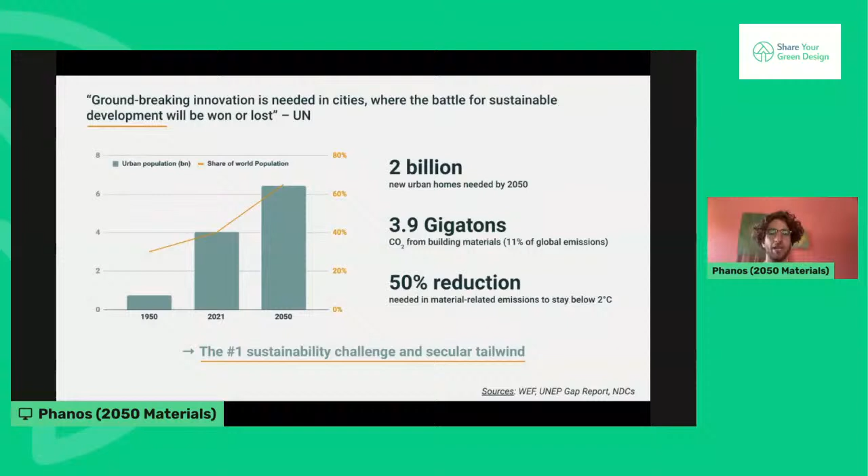Now, the very specific problem we're looking at at 2050 Materials is that currently the construction sector has no cost-efficient way to build these necessary sustainable buildings. While there are examples, and I'm sure that on the Share Your Green Design website you can find a bunch of examples of sustainable buildings, it's unfortunately still far from being the common practice in the sector.

And a big reason for that is that it just costs more money usually to do the necessary processes which define what a sustainable building is. So more specifically, you have these large architecture, engineering, and construction companies that are committing to deliver sustainable projects. Now these companies, in our research, have no tools that allow them to translate these sort of targets into a design practice. So what that means is that usually there are external professionals that have to deal with sustainability factors that come into play to do a lot of this translation.

So if you're an architect that has worked on such a project, I'm sure you can vouch for the fact that it's quite a tiring process, and also simply costs more money and takes more time.

And then finally, and really most importantly from a climate perspective, the design process is unfortunately still decoupled from the actual materials procurement process. So what that means is, even with the best intentions of an architect to deliver a sustainable project, then what they might design and what they might deliver might not end up being the real building that's put up.

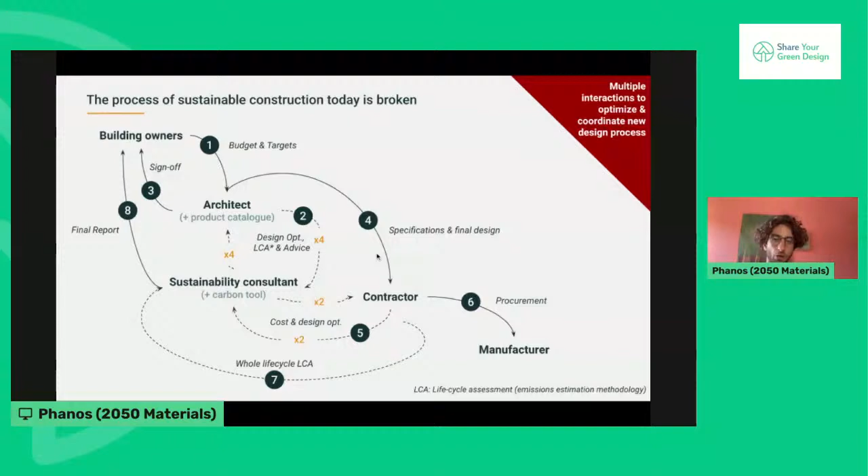Now a little bit on what we actually do. 2050 Materials is building a workflow to track, implement, and build the low carbon buildings that need to be built within the budget of a client as well as on time. We're building a workflow that allows you to preset whatever climate targets and constraints you have for your project, and our platform lets you receive optimized designs from a materiality perspective that allow you to meet those targets.

And very relevant to this specific topic of the webinar today, we have a large product database where you can both find products as well as source them and eventually put them together to report on the performance of the building.

The reason we focus so much on materials as a group, as a company, as friends working on this idea, is that what we kept hearing from architects and designers is that consideration of all the new and alternative materials is very necessary, and it's something clients are asking for as well, and architects want to look at. However, the fact that there are all these new materials and new parameters that need to be looked at adds a layer of complexity to the specification process.

While it's a lovely idea to think that everyone will learn every single detail on these materials and really be an expert on what they need to specify in order to align their design with sustainable development, we think that simplification is warranted in this case. So what we try to do is essentially put the data around these materials in front and then allow easy comparison.

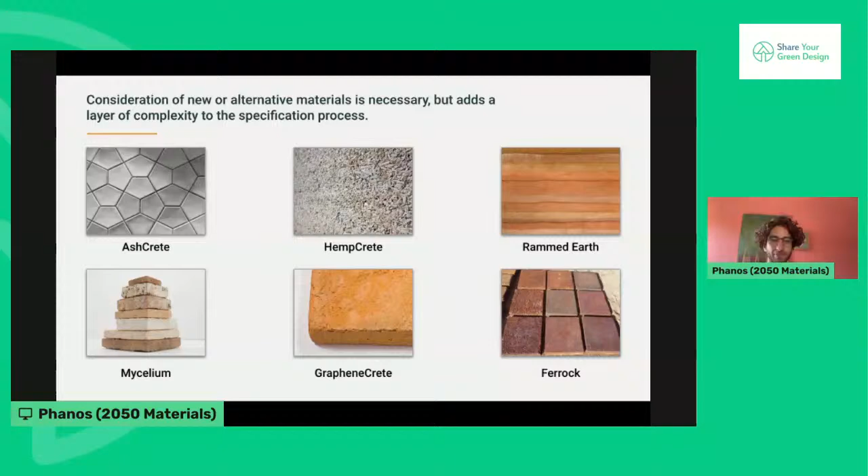What we're currently developing, and I'll talk a little bit about that also in the Q&A if there's interest, is what we call a project workflow, which is essentially the bridging of the tool side of things with the product library.

A little bit of feedback from the industry. When we launched our beta publicly, we received quite nice feedback from the industry. Of course it's very nice as a group to just get some positive feedback after working so hard on this topic. What's even more important for us is that there really seems to be something we have gotten right, and that is that in the space of sustainability and materials, there really seems to be a gap in a solution that helps architects and designers really understand the data behind those products.

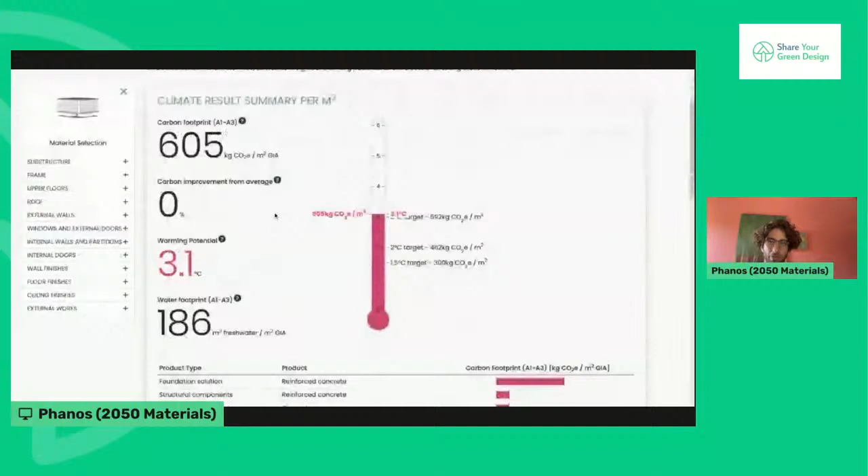Then you can generate one of our dynamic tools. What you see is data on the embodied carbon of the building. We currently cover life cycle stages A1 to A3, essentially everything related to manufacturing these sustainable materials. We also translate these metrics into a warming potential metric, an indication of the building's contribution to a specific climate scenario.

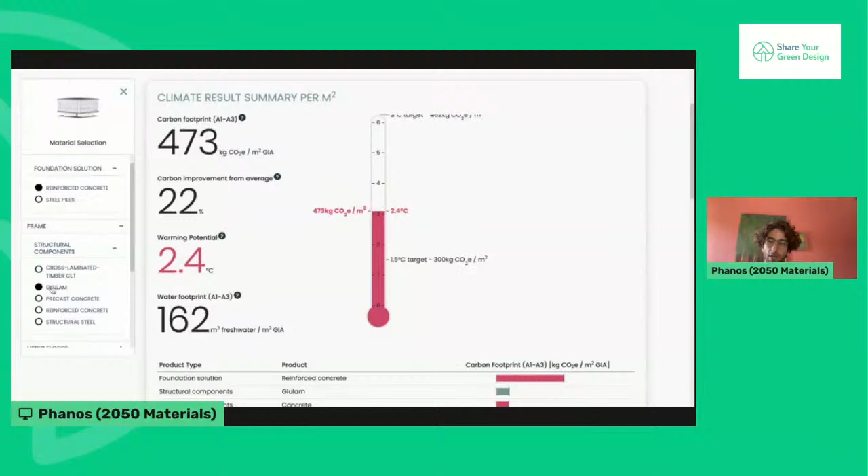The reason I call this tool dynamic is that you can go into these dropdowns and play around with different selections. When you do, we automatically calculate the embodied carbon footprint of the building per meter squared, as well as all the other related metrics.

This includes the water footprint, the warming potential, and how this building compares to an average building. All of these apply both to structural components—substructure, frame, floors, walls—and all the way down to finishes, both wall and floor finishes.

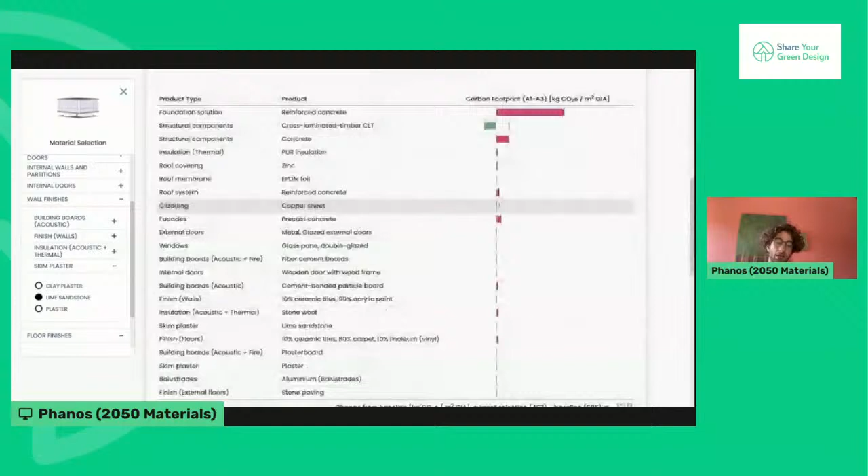What's interesting about these tools, especially from architects we work with, is that you can use them to get an initial understanding of the hotspots and primary sources of emissions in a specific selection of materials.

What you see here is a plot of the embodied carbon footprint per meter squared of gross internal area of the building for each selection. So if I select structural steel in my frame, you'd see this appear here, and if you hover over it, you'd see the amount of emissions related to that.

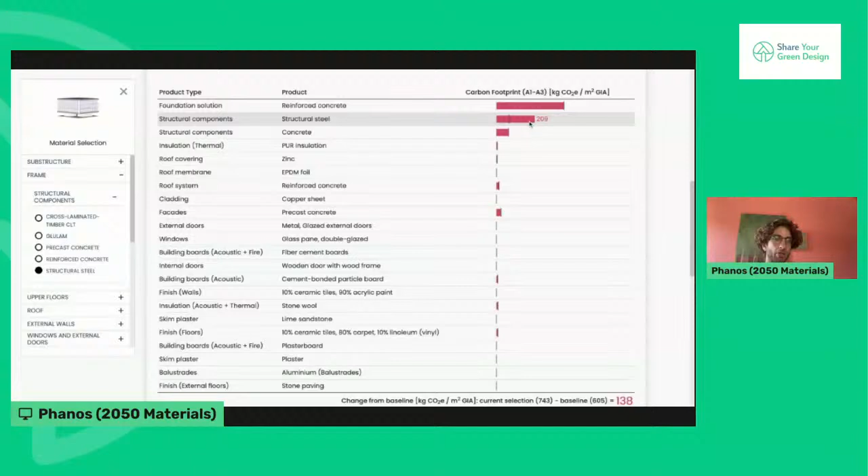Then we have this black line that indicates what we consider the baseline—essentially what is most commonly used in that component of the building—so you can see whether you're on average exceeding that baseline or below it.

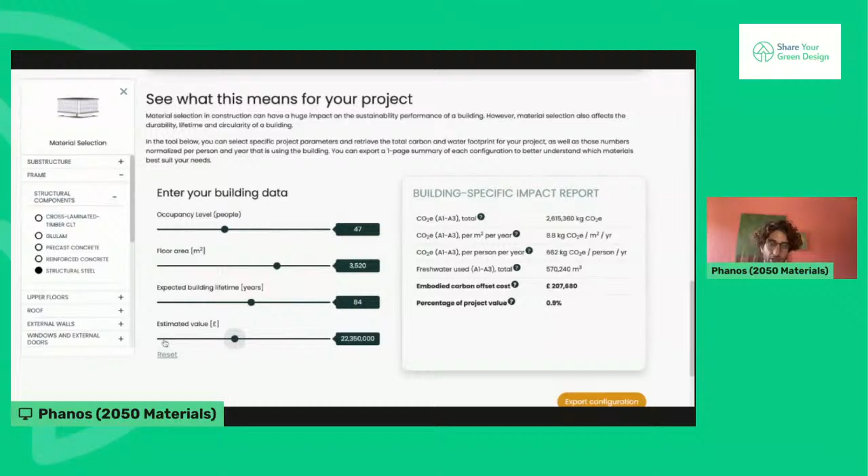One last thing I'll show is that all of this information can be made specific for your project. You can enter the occupancy level of the building, the floor area, the expected lifetime, as well as an estimated value. What we provide here is the total carbon footprint of the building, not per meter squared but the entire amount, as well as the same number normalized in different units. For example, we show the carbon footprint per meter squared per year, which indicates how much emissions are attributed over the building's lifetime, and we do the same on a per person basis.

The reason we have these kinds of tools is to generate discussion in the construction sector. We want architects and designers to go to their clients and discuss the differences between building something meant to last an expected lifetime of 100 years with 120 people, versus building a pop-up store that only lasts, say, 1 or 5 years with a much lower occupancy level. We want to generate discussion around how much carbon footprint each type of building, depending on its use case, is supposed to emit, and we're providing these metrics before there are official benchmarks from regulators.

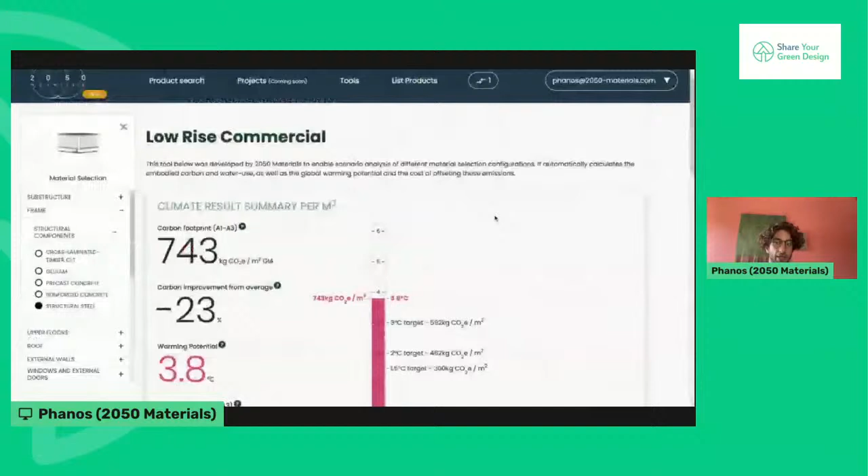Now, all of this information is exportable, and again, I invite you to check out these tools. Everything is currently free on our website, so you can export these reports or bring them into your client meetings to generate some of this discussion.

Moving to the product side of things, here we have the product library. You can search for products in a few different ways—for example, by application, meaning by building applications, or you can type in a specific product. So I can search for tiles, and I'll see all of the tiles listed by manufacturers on our website.

What we try to do is create all kinds of filters to enable architects to really get to the specifications of a product that solves their needs. That includes filtering by material type, so you can, for example, just select clay. You can also filter by product type, the company or brand providing it, fire performance, and product certification—so if you're looking just for products with environmental product declarations, you can filter for that.

Within this process, you can open a product page and see all of the relevant information provided by manufacturers. You see certifications here that are downloadable as PDFs, and a lot of the work we do as a company is extracting information from these certifications and digitizing it in a format that's easy to find and compare between products.

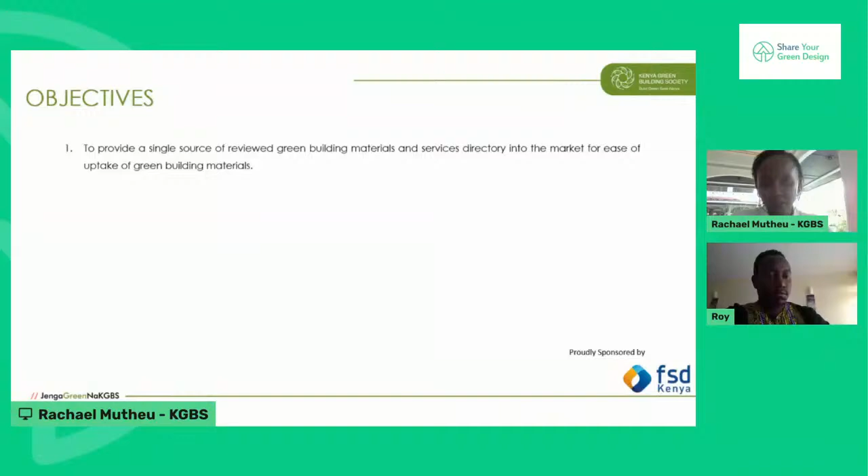So that was a big gap we were trying to solve. Then the second objective is to demystify green building products by democratizing the information on the product. So when we showcase products on the platform, you're able to take them as the single source from objective one, but we also give you more information - so we are saying this is a sustainable product, why is it a sustainable product? We list the efficiency features of that particular product.

And the other objective is linking developers to material suppliers, stroke manufacturers, and service providers. So again, the linkage - you ask people, do you know if these things are manufactured in Kenya, or do you know of this particular product? And they'll be like, I have no idea, so I'm just using the conventional materials because I don't know any better.

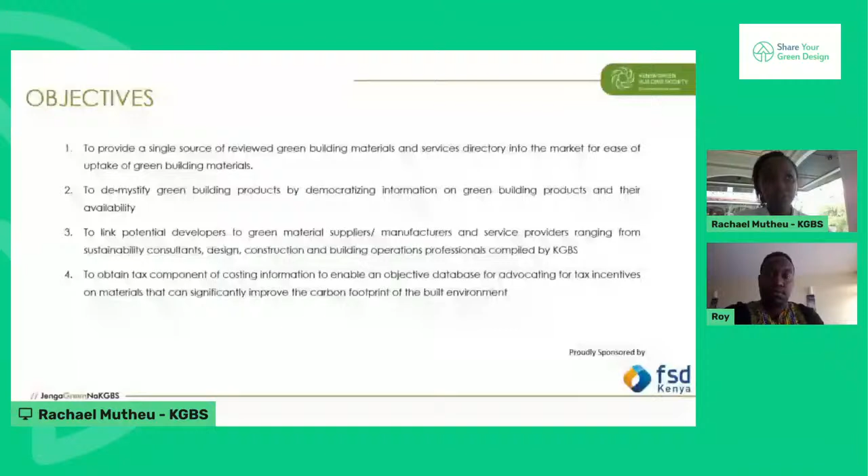So that's another gap we were trying to answer - obtaining the tax components of the cost information. We will do a preview of what the library looks like, and we'll see that it has pricing components for the materials with a disclaimer, of course, that these are prices as of this time period, so that when we get to the point of advocating for tax incentives on materials, we know where we are coming from, what the costs are right now, and where we envision the future looking like.

As you remember, one of our other mandates as KGBS is advocacy, and number 4 is understanding the pricing of green materials.

The functionality of the library is that it is hosted on our website, the Jenga Green Library. We'll do a quick dive through that. It's also available as a free Android and iPhone application for anyone to use, and I'll share the link in the chat box after the presentation. You can access the library through this link tree link, and we have over 140 products and over 20 service providers.

Since the launch, we've had 500 interactions within the web app, the mobile apps, the iPhone and Android applications. So we definitely see the gaps we're trying to solve, getting people's attention with the interactions, and we hope to grow the interactions more.

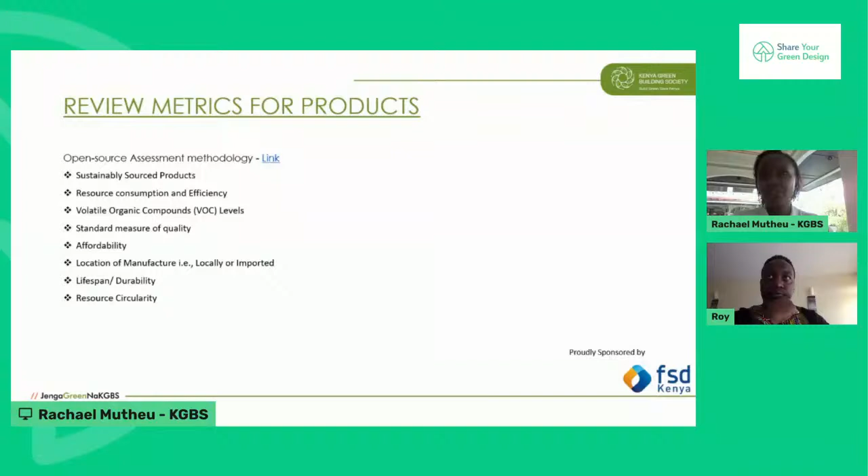Just to run through, we'll share the slides and show you where on the website you're able to interact with the methodology for review comments. This is again open source, so we are reviewing the library — comments are welcome.

This is divided into energy solutions and green building design consultants, and another category on circularity, which covers circular building products and recycling companies.

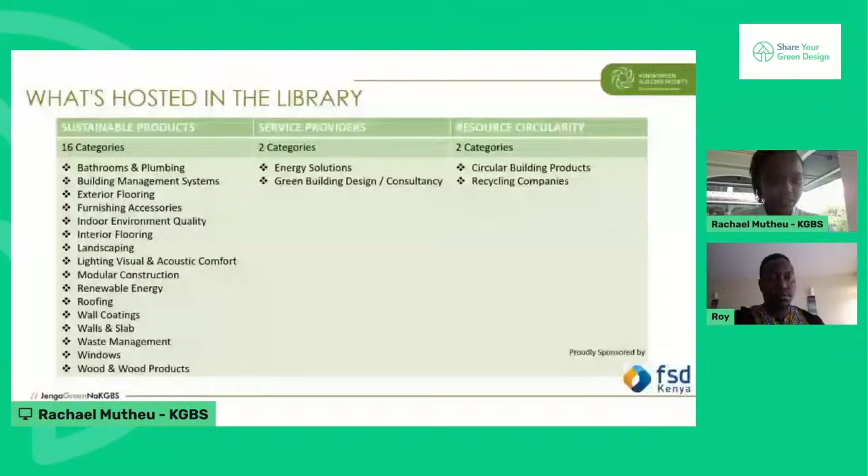Just a quick overview of what the library offers. I'll share a quick snippet of a video now.

That video shows how you interact with the web app. Once you're on the web app, we'll do a quick dive into it — you're able to find the different categories, then look at each product as you'd like.

So here we are in Kwangu Kwako studio apartment, which uses modular construction. You can see the company name, the price per unit, and as we said, there's a price disclaimer for anyone posting the product within the directory, along with the company website — because the library isn't essentially a sales website, but rather a platform providing this information. We provide the link to the company website so you can interact with them further, and if you want to make a purchase, you do it directly on their site.

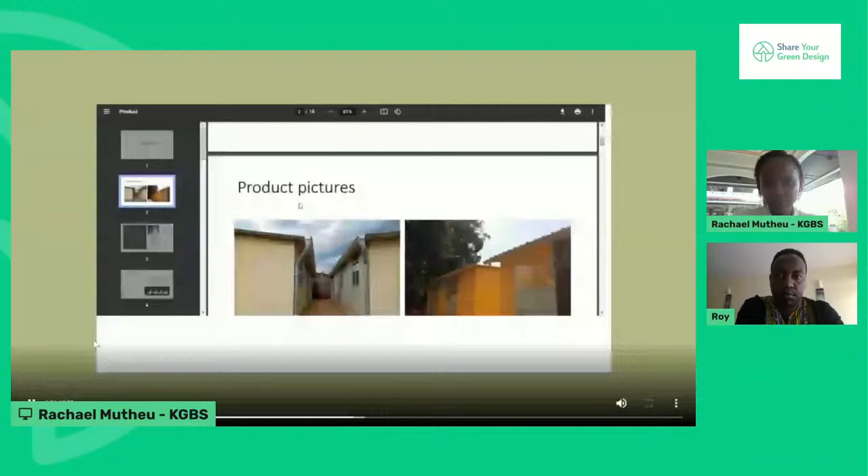So I think... so this now is on your mobile phone.

So now you use it on application, which ideally shows the same interface as the one on your screen, and you browse different categories. If you want to look at services, you can see the credentials of the service providers. If you want to look at resource circularity, you look at either products or companies in the circularity space.

I'll just move on to the next slide, and everyone will be sharing the link to access all this information in the library, both the web app and the mobile applications, for your further interaction.

So I'll introduce Roy to briefly introduce the next work stream we are working on in terms of sustainable building materials. I look forward to the question session at the end of our presentation.

Thank you much. Thank you very much, Rachael, for that.

So I'll jump into the ABMTs. Before that, I'll also speak about why we wrote alternative, appropriate, and emerging. With this stream, we have alternative building materials and technologies - that's what it stands for. However, when we started this research, we realized a lot of these things just end up as documents, because there's no appropriateness to it. So we started looking at appropriate building materials, which is more or less localized materials, which now leads to localized services and the likes.

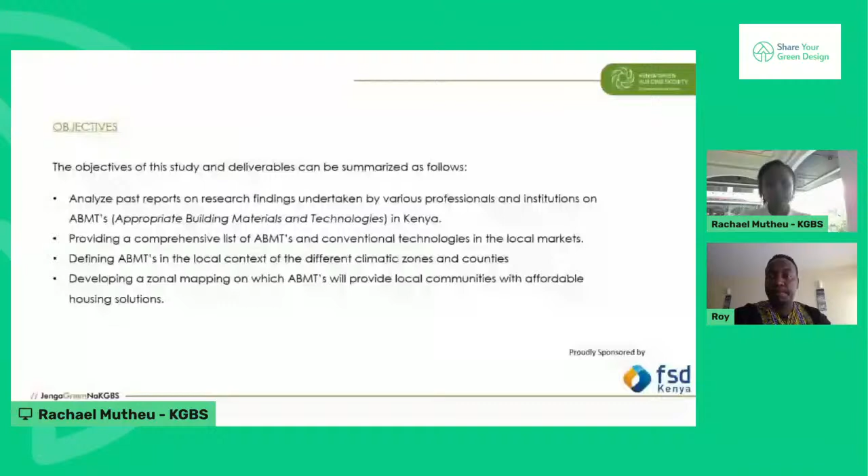Hello? Hello, I don't know what happened. Sorry about that, I don't know what happened to my link.

However, what we start to see is that the inclusion of these materials from different counties in different locations in Kenya will now create that linkage between the location and the materials that are going to be used.

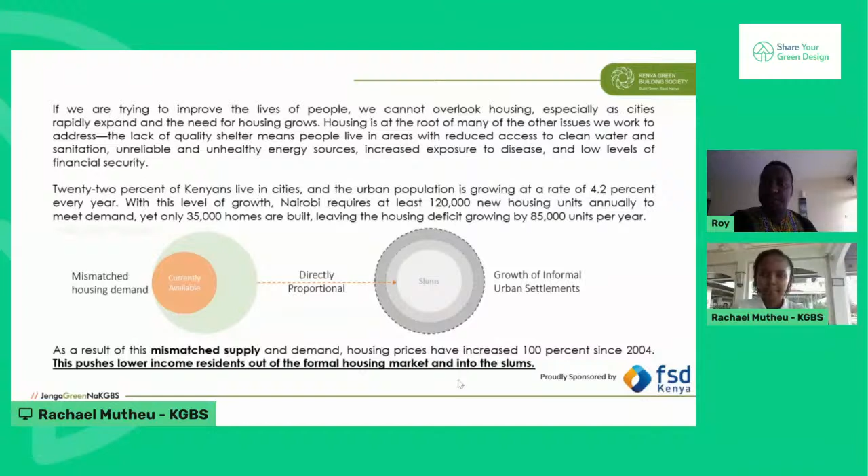So what we came to realize is that we have to find a couple of creative strategies to try and solve this issue. We may be looking at materials, but when you start looking at materials, you're also trying to solve affordable housing at the same time. That's why one of the creative strategies is to look at alternative and appropriate building materials and technologies.

We start to find that the land is too expensive, so if we can make this land more affordable - putting this into perspective for someone living in that specific location - having creative financing, innovative design, keeping things simple but creating good quality spaces, developing contracts with suppliers so prices aren't hiked, and community supported labor. That's talking about culture, it's a need-based construction system, instead of having to import people from different countries to come build your houses.

So there needs to be a shift from simply looking at cities, because one of the problems we're seeing based on the previous slide is that you have that deficit with regards to housing, but the only focus is on cities. If we start to focus on secondary cities and towns, it would be ideal to develop these strategies, reducing the pressure on primary cities, which in turn reduces the pressure on informal urban settlement growth.

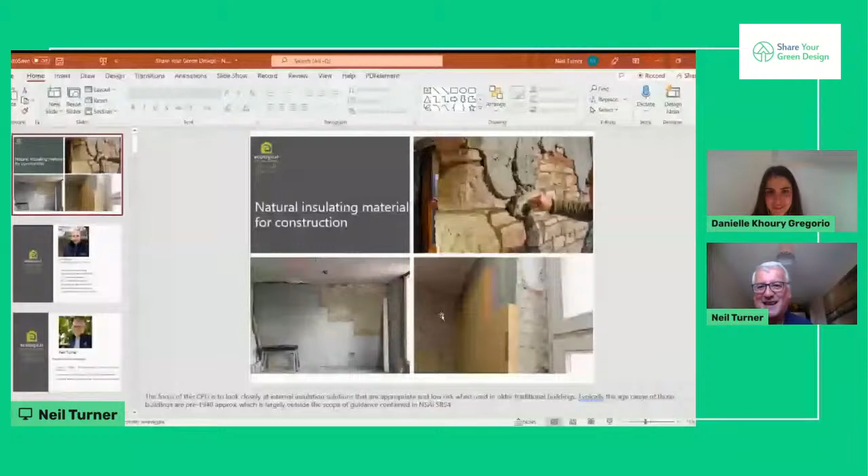Okay, well, thank you very much. And Neil, you are mute. Am I on mute? No, now we hear you. Good. So let me just share my screen. It doesn't want to come up again at the moment. Okay, can you all see this? Yes, we see it. Okay, excellent.

Okay, well, good afternoon, everybody. My name's Neil Turner. I work for a company called Ecological Building Systems in the UK. Today was supposed to be presented by my colleague Joe Fitzgerald, who heads up the technical department in Ireland, so I'm standing in for him today. Basically, I'm going to be talking about natural insulation materials for construction.

I'll just introduce both Joe and myself. Joe works in our Ireland office. He's the technical specification manager, and he's got a diploma in green engineering. He also does things such as thermal modeling calculations, WUFI calculations, and he's a certified passive house tradesperson.

In terms of myself, I'm quite unusual in that I'm a scientist by education, but I've worked in construction now for 25 years. You can tell I've been around a fair while because of the grey hair. My bulk of experience in construction is really with natural insulation. I used to manufacture cellulose insulation from recycled newspaper. I'm also involved in developing European standards for new insulation products and developing new test methods.

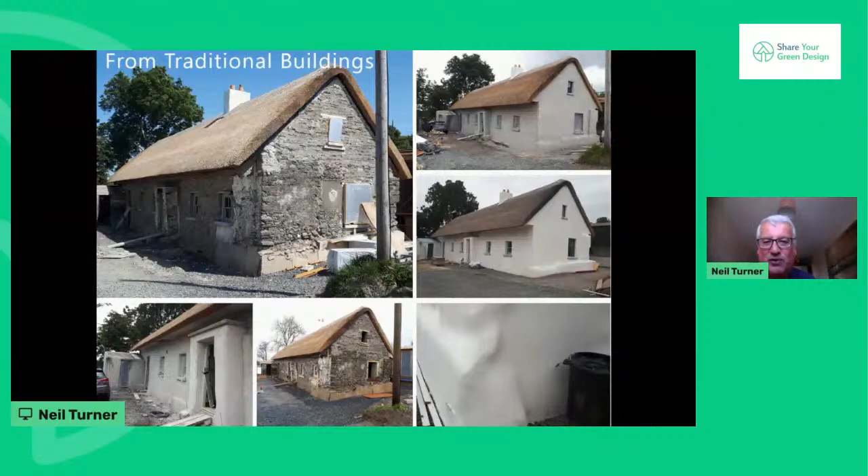A lot of people are surprised by this, but natural insulation products are extensively used in traditional buildings - solid stone, solid brick - and they're also used in new build. So you can use these natural type insulation materials across a whole broad spectrum of building types.

In terms of resource efficiency, I know in Ireland they've already adopted the NZEB standard, the nearly zero energy building standard for new builds. So people say, well, we're already building to a much higher standard, why do we need to consider the materials? There is a standard that's actually more onerous than NZEB, and that's Passive House. But basically there's really a limit as to how thick you can necessarily insulate a wall, roof, or floor.

So you could then ask the question - how can you actually get more reduction in the carbon impact of construction? The theory, the principle we've been promoting for the last 10, 15 years, is that you push your building fabric as far as possible. And you must adopt a fabric first approach - thicker insulation, cutting your thermal bridging, careful material selection and planning, build quality, and energy efficiency. You've got to have healthy buildings, so ventilation when building to high insulation and air tightness, while having an overall low ecological impact and an ultra low energy demand in use.

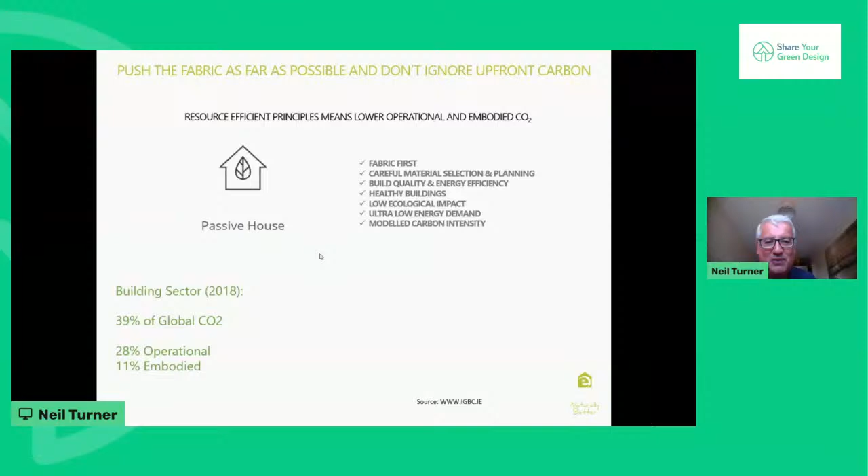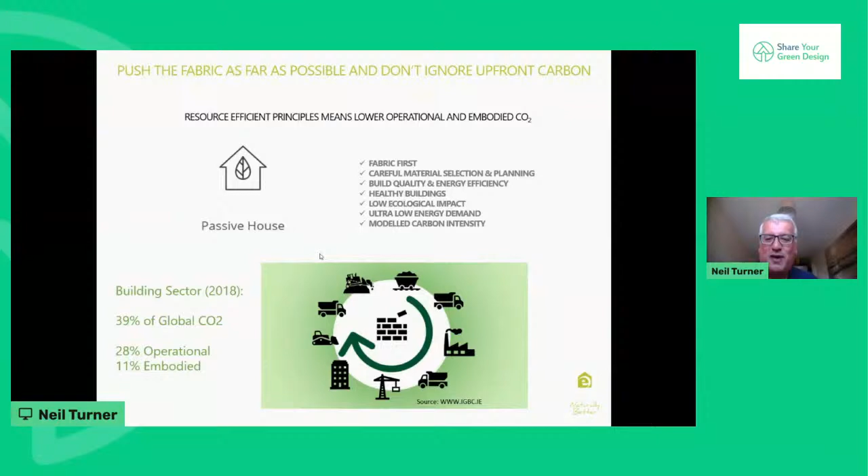Now, all of these things are essential if you're going to have lower carbon in construction. But the one thing people tend to overlook is the actual carbon profile of materials. At the moment, the building sector, as of 2018, contributes about 39% of all global CO2 emissions. 28% of those emissions are operational - the lifetime CO2 emission from heating the building, cooking, cleaning, lighting, and using electrical goods. But 11% of this 39% is actually the embodied energy in the construction materials. As our building standards get better - lower U values, better requirements for the envelope, reduced air permeability - the percentage of embodied carbon in your materials becomes bigger and bigger.

So why then choose natural insulation products? Well, a lot of these products contain very high levels of absorbed carbon. The best example is wood fiber. Wood fiber starts its life as a tree, which throughout its life absorbs lots of CO2 and emits oxygen. So when you convert the waste offcuts from a sawmill process into wood fiber, you're actually locking a lot of carbon into the building.

One kilo of dry timber can sequester roughly 1.8 kilos of CO2 equivalents as carbon. It's the same with other materials such as cellulose, which is made of paper. And then you've got hemp crops and cork trees, which are all absorbing CO2 in their lifecycle. So when you use these materials in a building, that's making a much bigger contribution to reducing the overall CO2 impact of the building.

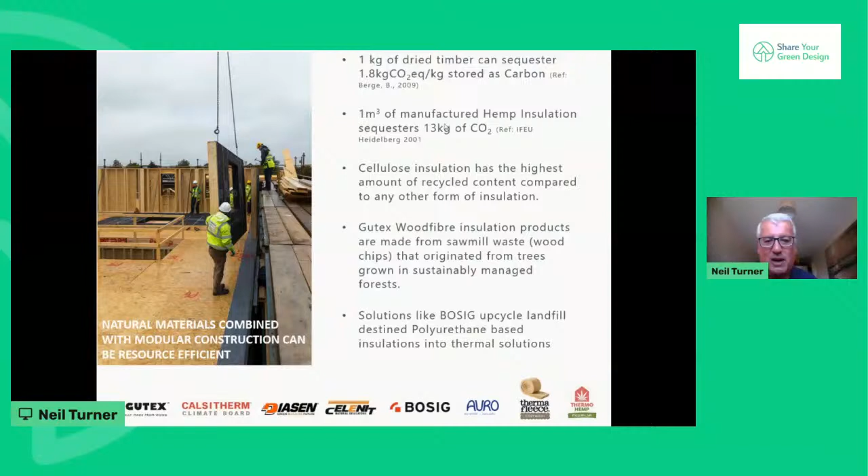So obviously in the UK at the moment and Ireland, there's a big drive to maybe build less new buildings and refurb existing buildings. There are lots of commentators who say the most potentially environmentally friendly building is the one that already exists. So obviously if you build nothing, which is not possible - in other words, you try to build less and maximize the use of existing assets.

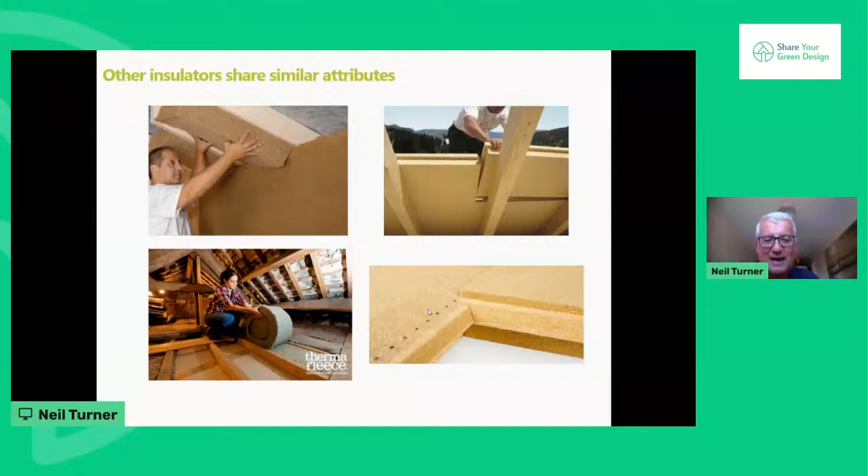They all contain lots of carbon. They all give very good thermal performance in the winter. Their thermal values are very similar to mineral wool. These natural products also have very high specific heat capacity, and the boards in particular are very dense. What that means is you can actually stop or reduce summer overheating.

So if you imagine all of the heat beating down on an envelope during the day, if you've got wood fiber externally, the wood fiber, because of its high heat capacity, can actually slow down the speed at which that heat transfers through the building envelope into the building. Then if you're somewhere like the UK, by the time the heat does get through, you're into night cooling, so the heat is then moving from inside back outside anyway. So these are all the performance benefits of the natural insulants.

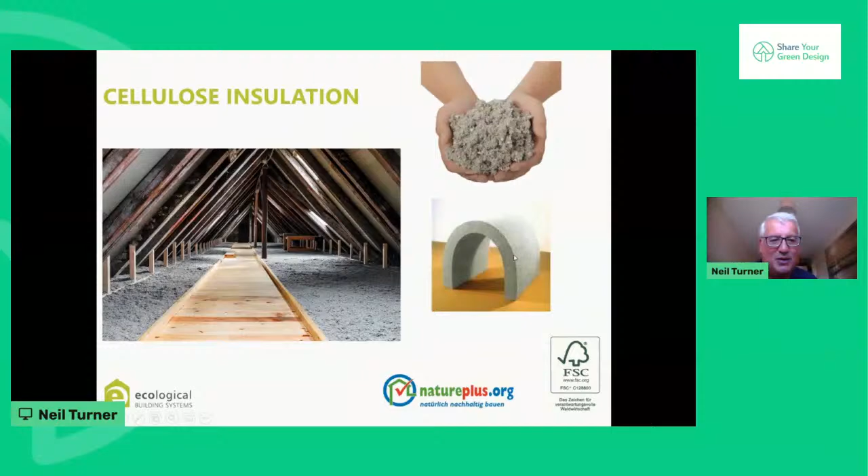This is just a photograph of cellulose insulation. This is a loose fill material made from recycled paper, and it has a very high recycled content. There's a small quantity of fire retardants added - usually you're using bath salts, magnesium sulfate, and also things like boron compounds. You can see here where it's been open blown into a cold loft space. You can also have flexible batts that you can friction fit in between.

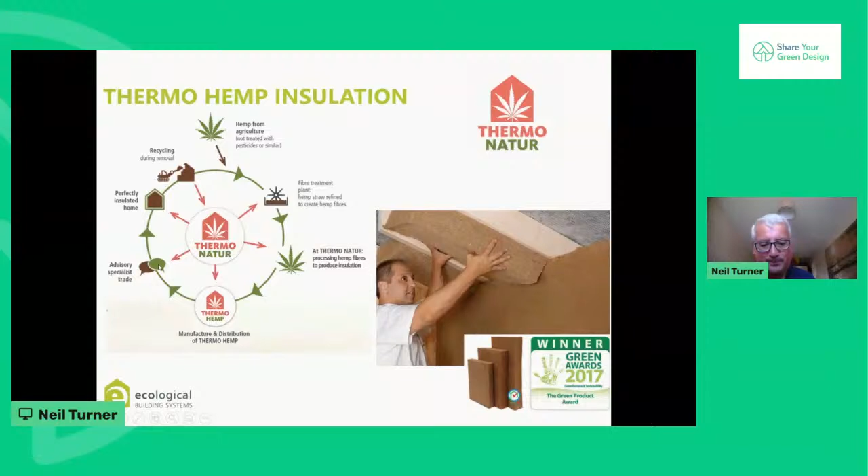And then this is just showing the sheep's wool. I know in the UK, the clothing industry for wool has diminished significantly, and there's a lot of spare capacity of sheep's wool in the UK. So there are a couple of companies now that convert sheep's wool into insulation quilts. This is just showing it being insulated in between timbers.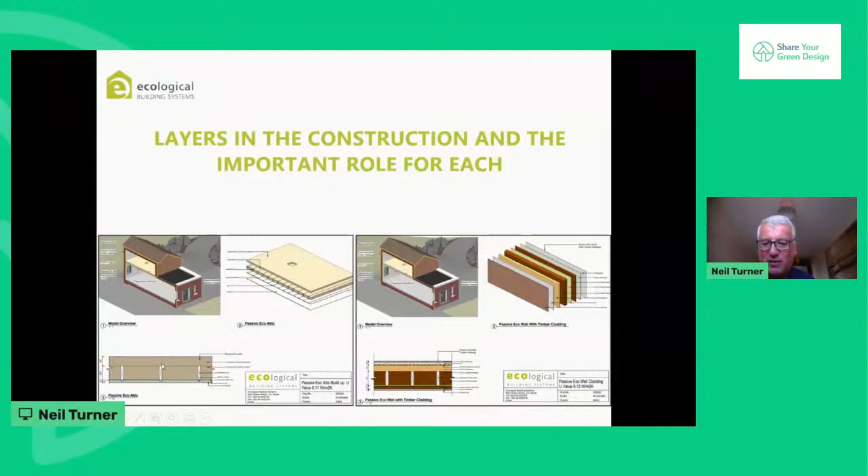Now, I mentioned thermal bridges a few moments ago, and this slide shows the importance of the different layers of insulation in the construction and the role for each layer. If I take you to the bottom here, you can see your primary insulation is installed in between timber, and then you've got another layer of insulation laid across the top. So what you're doing is cutting that thermal bridge through the timber. It's very important when you design that you minimize or eliminate thermal bridges.

This is just showing an example of a passive raft floor system. Here you've actually got a petrochemical water resistant insulation below your floor slab, and you can see that this wraps around. So you're then using wood fiber here externally to your timber, and this one has cellulose in between. You've also got wood fiber internally as well. So you can see that this heat flow path has got insulation, and you're actually blocking off this thermal bridge here, and also blocking off the thermal bridge there. Thermal bridges is a common problem.

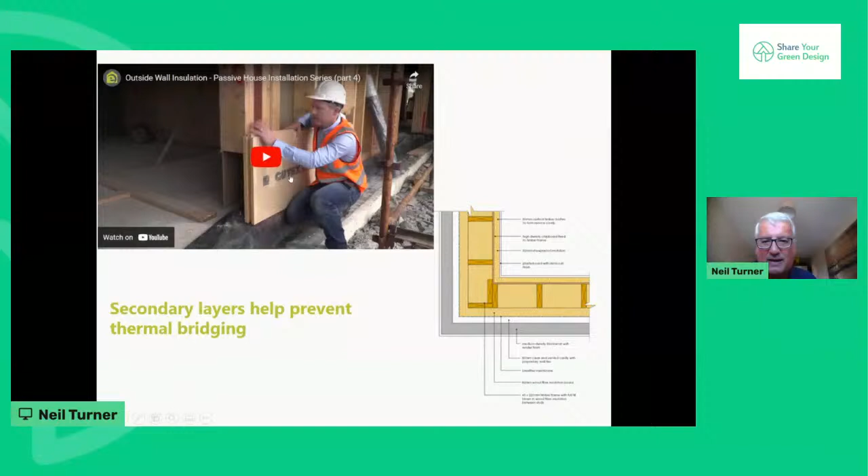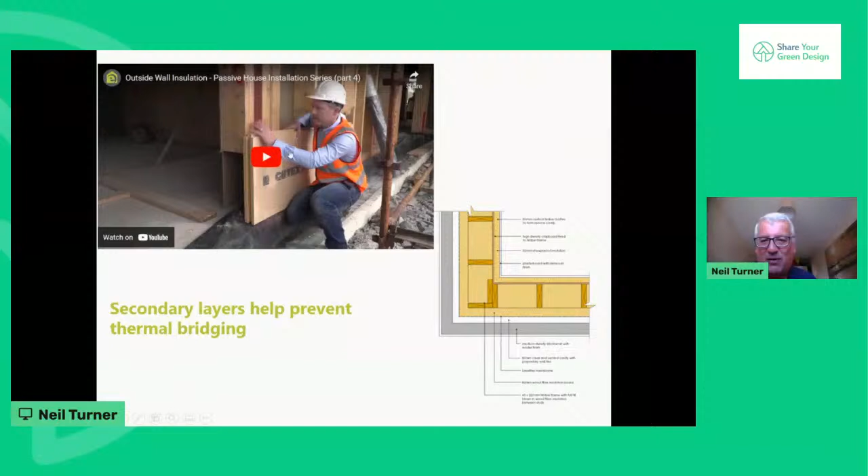This is just a short video showing you an example where, using wood fiber externally around a timber frame, you're kind of wrapping the building in a tea cozy. So you're keeping your building warm like your pot of tea. I'm just going to play this video, it's quite short.

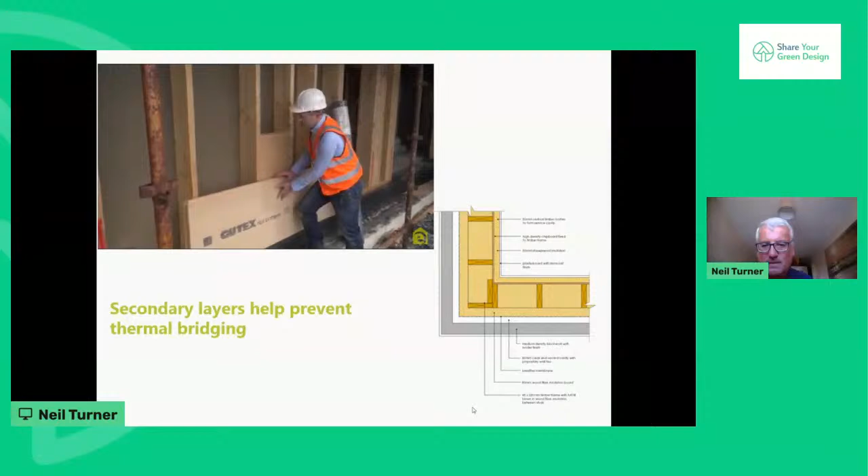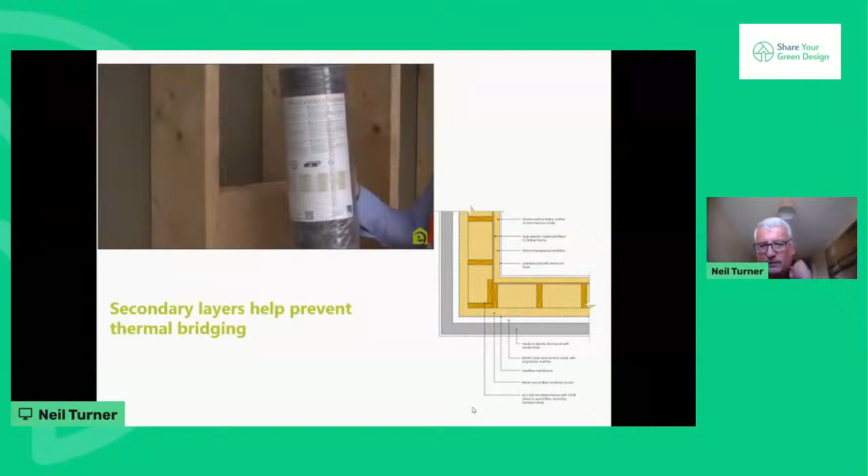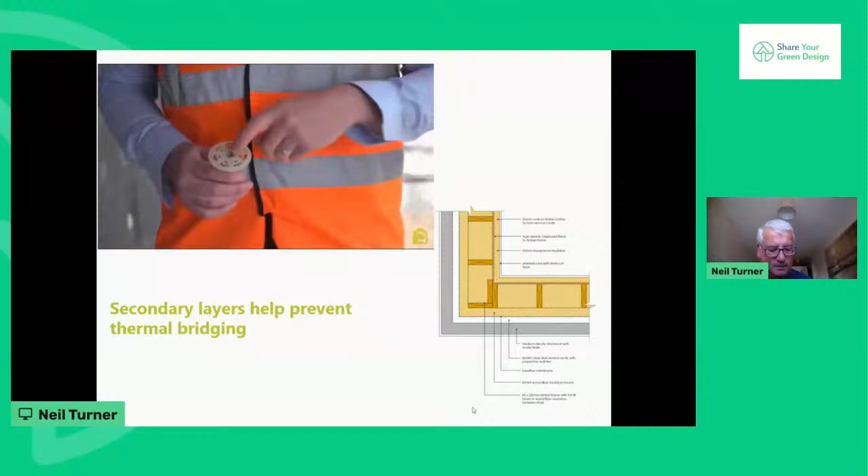On the outside of the timber frame wall, we will install Gutex Multitherm. Between every stud, Gutex thermofiber will be blown to fill the stud, about 225 millimeters deep. In hard-to-reach areas where thermofiber can't be blown, I will be installing Gutex Thermoflex, a very flexible bat that can easily be fitted between studs. As you can see here, it self-supports, so in tricky areas where injection of thermofiber can't go, we'll be filling with these bats of Thermoflex at a later stage. On the outside of the walls, Gutex Multitherm will be fitted back to the stud. After the Multitherm is fitted, a membrane must be applied over it, because in this case I have a block outer leaf. If we have a timber cladding outer leaf or a cement board, then a membrane is not necessarily required. But when you have a block or brick outer leaf, it is required to install a membrane called fronta humida. So this is the Solitex fronta humida membrane, which we'll see later on. When the Multitherm is fitted, this will be fitted in front of the Gutex Multitherm and fixed back to the wall. The main screws for fastening the humida and Gutex to the wall are thermally broken Fischer screws called Thermofix 6H fixings. Following that, there will be wall ties fitted through the Gutex, the humida, and back to the stud to tie back to the outer leaf block work.

Attaining high levels of air tightness and effective ventilation are key components of building a healthy, low energy passive house. Another aspect is thermal bridging, trying to minimize thermal bridges and the associated mold, condensation, and potential structural issues, as well as energy loss that can occur at these points. This is one of the main reasons I'm applying Gutex on the outside of the timber frame, because like all real buildings, it's inevitable that some thermal bridges can occur for structural steel connections and so on.

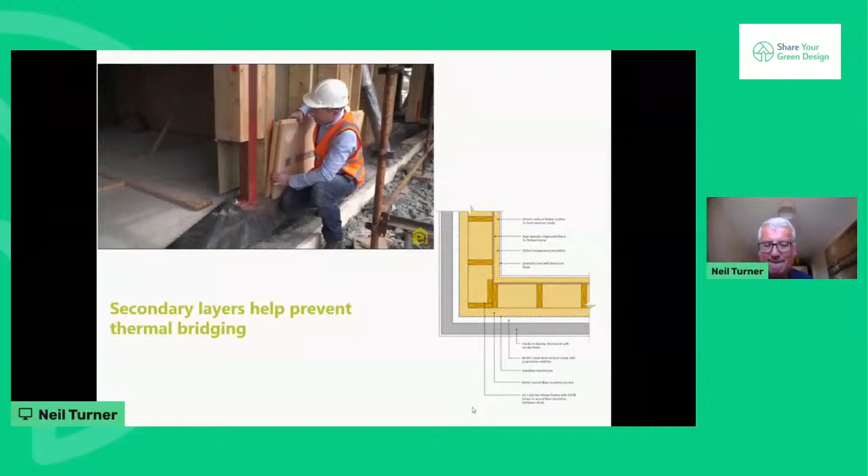On the foundation of our house here, we're using a Kore passive foundation system, so the whole foundation is a raft of insulation onto which the concrete is poured. On the outside of this whole panel here, beneath this damp-proof membrane, the Kore insulation wraps right up. Yet this is thermally broken from below, but on the outside it could be a major thermal bridge. So this is where the Gutex has a key role to play in isolating thermal bridging. Because now the Gutex, being on the outside of the frame, 80 millimeters of Gutex is applied to the outside of this, and now this breaks the thermal bridge at the window, at this steel point.

So this is the key reason why Gutex is effective on the outside of the timber frame. It allows the breathability, insulates and maintains thermal continuity for the timber frame structure. This video shows the wraparound with a natural wood fiber insulation, cutting thermal bridging.

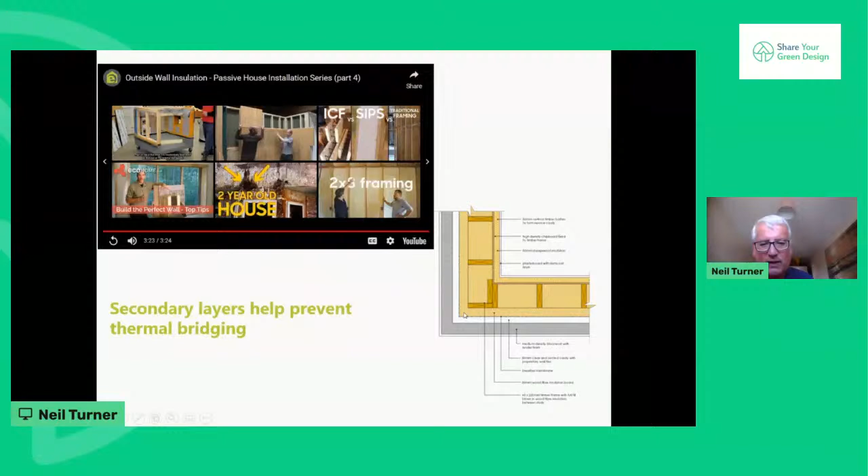And that's the link. So I seem to have...

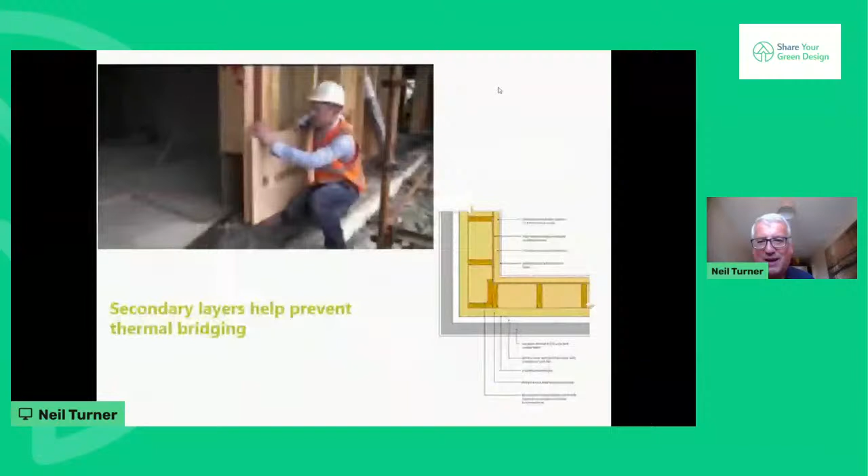Sorry about that. So this is just showing it graphically. You've got the cellulose insulation as your primary insulation in between your timbers, and then externally you've got your wood fiber, basically protecting and stopping any thermal bridging through this steel member.

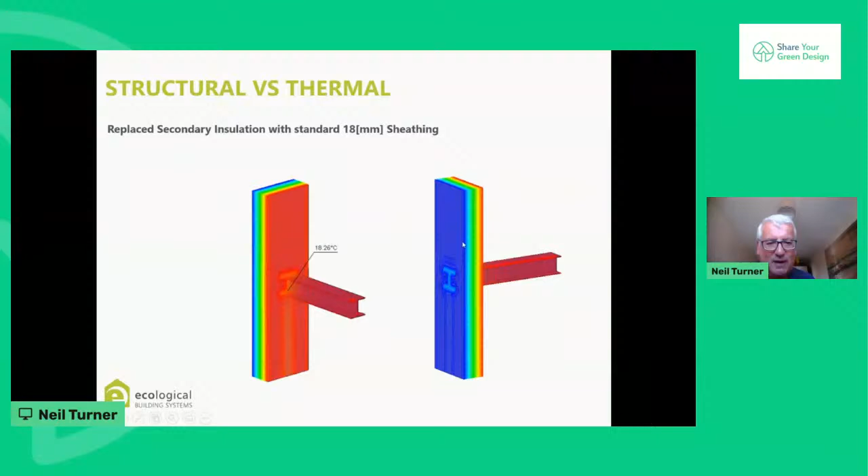So you can see that you've got uniform heat loss. Whereas if you replace the insulation with just a timber board, so there's no insulation here, you can see that you've got thermal bridging. This is just the same example with a roof. So basically you're wrapping the outside of your timber structure with natural wood fiber insulation.

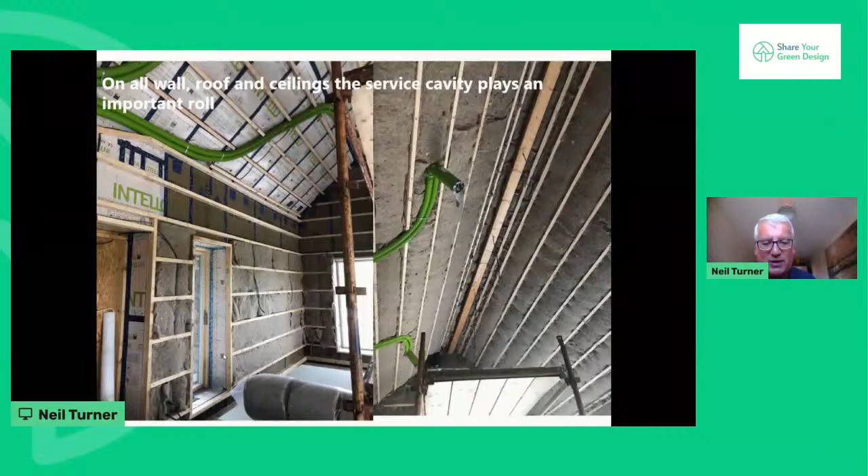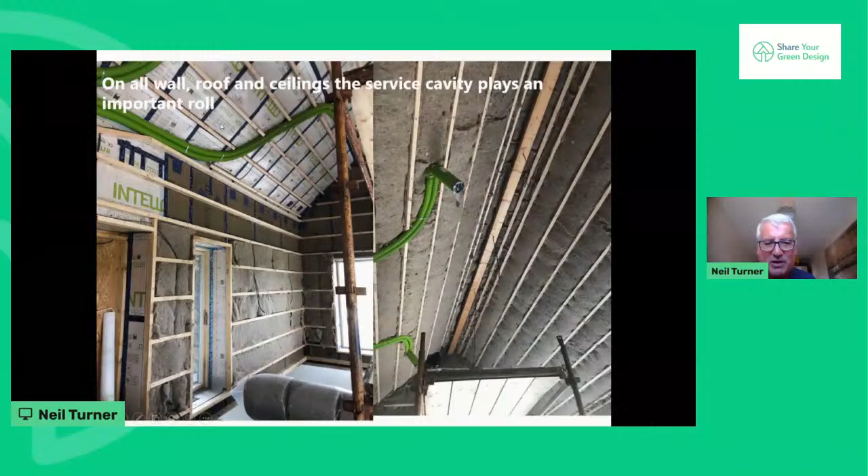Okay, so in terms of wall, roof and ceilings, your service cavity plays an important role. In other words, you've got battens, which create a space on the internal face of your insulation, meaning you can run services without damaging the membranes or the insulation you may use. But equally, if you want to boost your U value, you can also improve the U value by insulating this zone as well with natural insulation.

Okay, I've got not so much time left, but I'm going to go through a couple of examples now. So this is just showing natural insulation in retrofits of old buildings. You can see here you've got your roof, which has got the wood fiber on the outside. So that's an example of wood fiber.

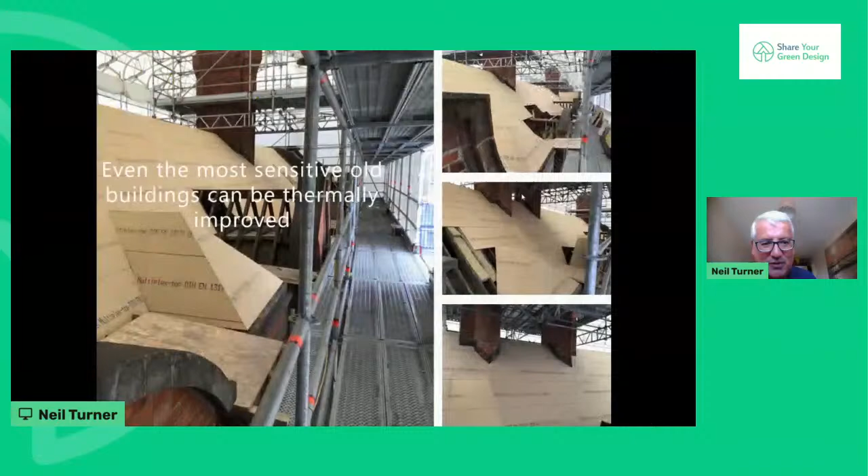I mentioned about cork lime insulating plasters. This is a product called Diathonite - Diathonite Evolution, Diathonite Thermactive. Basically it's a mixture of cork, lime, diatomite powders that come from volcanic ash, perlite, cellulose, pumice. These are all blended together, and then you wet spray it onto your brick or stone wall.

All of these products, by the way, the wood fiber, the cellulose, and the diathonite, they've all got environmental product declarations in accordance with ISO 14025 and EN 15804. So all of the carbon claims are validated.

But this is a cork lime product, and it's got similar properties as the fibrous material. Its thermal conductivity is about 0.037, similar to mineral wool, cellulose and wood. And also it's breathable, it's moisture vapor open.

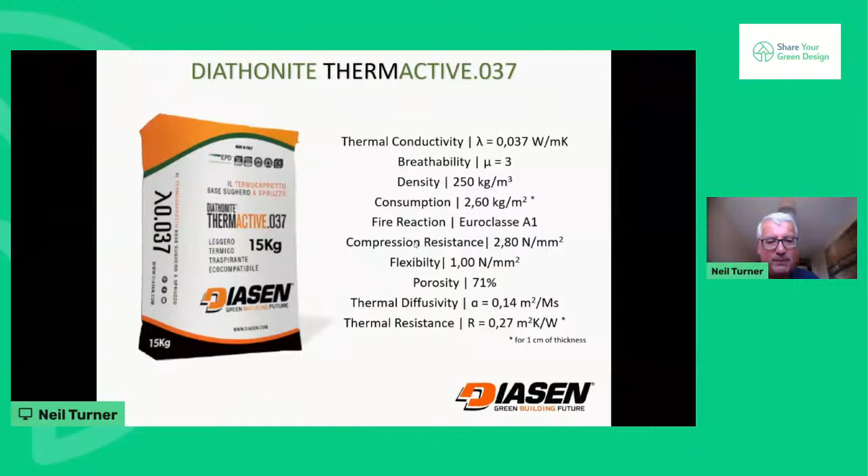And the way it works is that you're basically either spraying it or troweling it by hand onto a solid masonry wall. And then once you've built up your layers to get the thermal value you need, then you apply natural lime finishes and natural lime paint.

And what happens is, because this material is breathable, moisture can move from inside to outside, but also moisture can move from outside to inside. So you never get a buildup of moisture in your brick or your insulation structure.

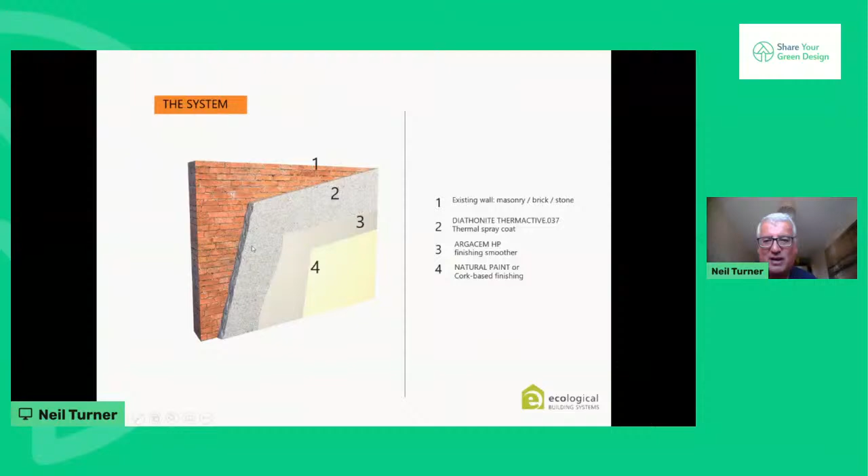This is just an example where the diathonite cork lime insulation was used. This was 50 mil or so sprayed internally, and then you've got this really nice lime finish. So it's all properly insulated and moisture vapor open, but you've got lots of cork as well, which is improving the carbon profile of the product.

This is a building in Cambridge, the University of Cambridge's Institute for Sustainability Leadership. What they did here is apply the cork lime thermal plaster onto the internal face of the wall. Then they bonded wood fiber onto this and did a lime finish. So this is giving you a sort of completely breathable system from inside to outside and from outside to inside.

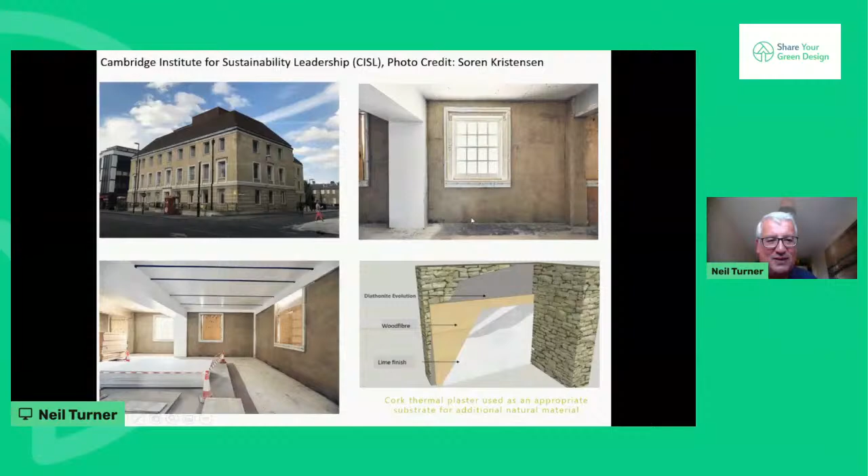Now this building actually achieved the EnerPHit, the Passive House Retrofit standard. And it also complied with the WELL standard - this is the sort of indoor air quality healthy living standard. In other words, the volatile organics and other pollutants from these insulation products are extremely low as well.

This is the restoration of the Primark building in Belfast, using calcium silicate boards. What they do here is apply a lime levelling coat, then bond the calcium silicate boards onto the wall. These are breathable and moisture vapor diffusion open, and very water capillary active, so they can absorb lots of moisture but then release it when the climatic condition changes. These are just some more pictures to show you the scale of the project.

And this is another project, 18 Ormond Quay in Ireland. You can see this is before, and this is after retrofitting. Again, they're using natural, breathable, low carbon insulation materials internally.

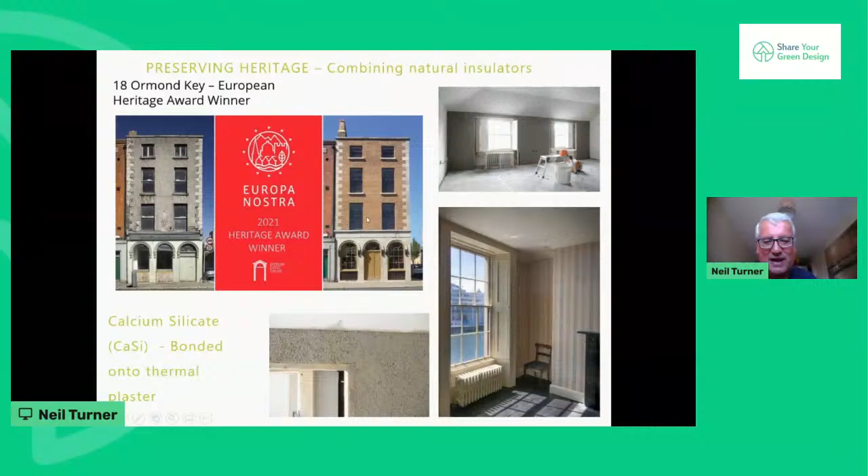The other thing to consider if you're going to use low carbon insulation materials is to use natural paints. Paints make a pretty big contribution to things like plastic usage and VOCs, indoor air quality, whereas you can now buy natural paints which are VOC free, volatile organic free, compostable, wipeable, and don't contain any plastics.

According to the World Health Organization, there's a lot of toxic waste produced for every ton of paint that's manufactured. The chemicals and plastic in the paint don't break down, ending up polluting water streams, and there are a lot of microplastics entering rivers and oceans from paint. So always consider using natural paints when paint finishing.

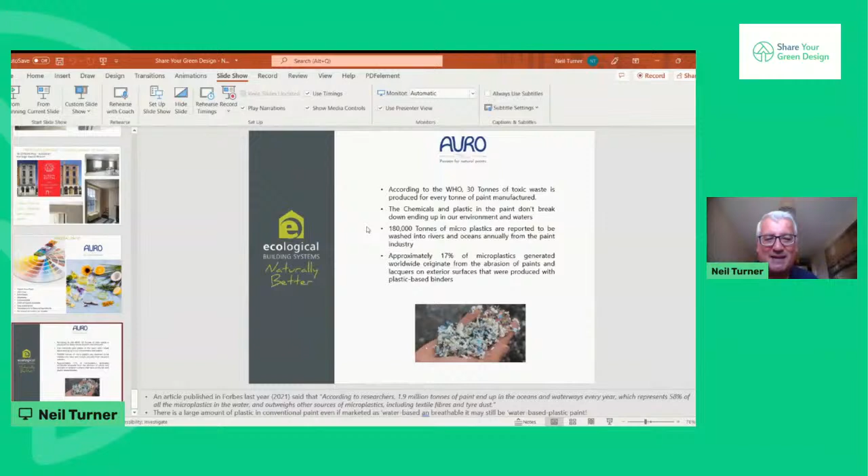So that concludes my presentation. As I say, I had to stand in for Joe at the very last minute, so I only got first sight of this yesterday. But I hope you enjoyed it. Thank you.

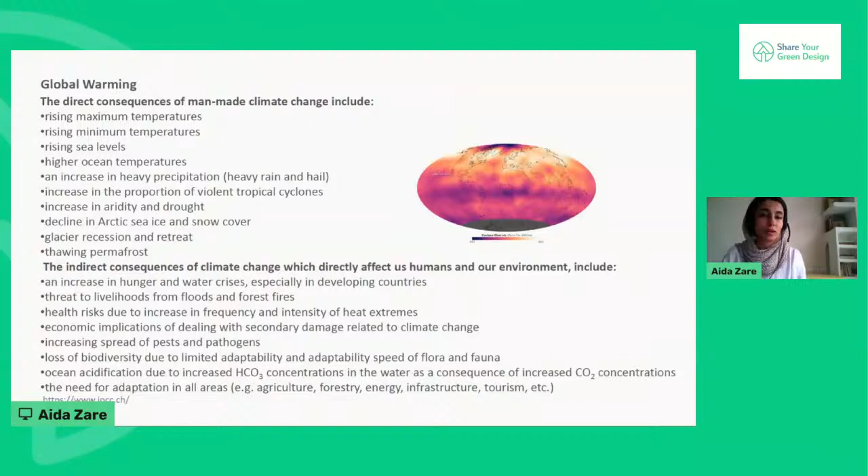And this integrated, balanced ecosystem is very fragile, and it faces a very concerning problem, which is global warming. I think all of you know about this problem, and we are all experiencing a very hot summer here, and it goes hotter and hotter every year.

Thinking about the causes of global warming, the part that architecture plays and the emissions of carbon dioxide is spoken about a lot. I think in the first series of these webinars, it was completely clearly explained, the amount of carbon emissions in different parts of the buildings, and also the building materials. So we can see there is a global problem, and architecture has a part in this problem, and of course can have a part in solving this problem.

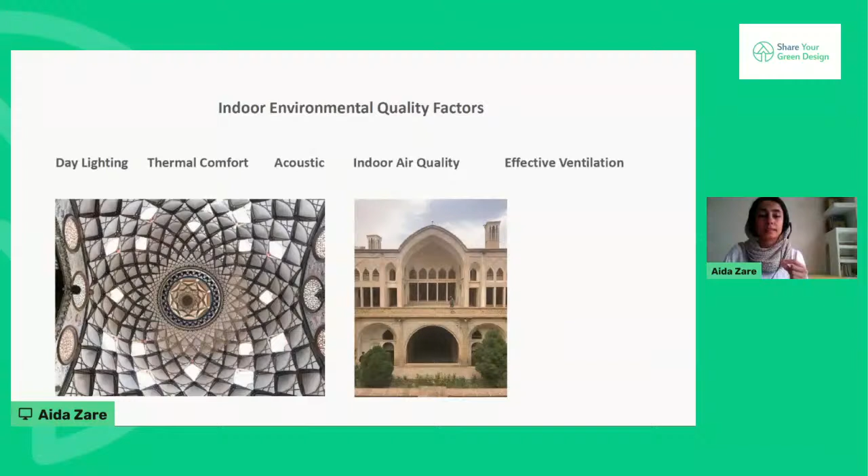There are different parts for sustainable designing and passive designing, different solutions, but there's something in all of this decision for designing, which is selecting the appropriate and sustainable material, and it's very important and effective at any scale. Nowadays we've heard a lot about sustainable material characteristics, like being non-toxic and having low embodied energy, or being recyclable.

Today in this webinar, we see some examples of sustainable materials and natural materials. It was very interesting for me. All natural material, geo-based material, or bio-based material that's gained from the earth, the nature, the fiber, or anything we can locally find, are more low embodied, they have low embodied energy, and they are more recyclable, and more acceptable for using in sustainable construction. But today I'm focusing on earth material, and this material has been noticed in recent years because of its undeniable ecological benefits.

And having a look at its life cycle assessment, we will find out that it's a very low embodied energy material, from extracting to construction, depending on which technique you want to apply, and to demolishing the building. It can be very low embodied energy, and you do not need any manufacturing process or factories.

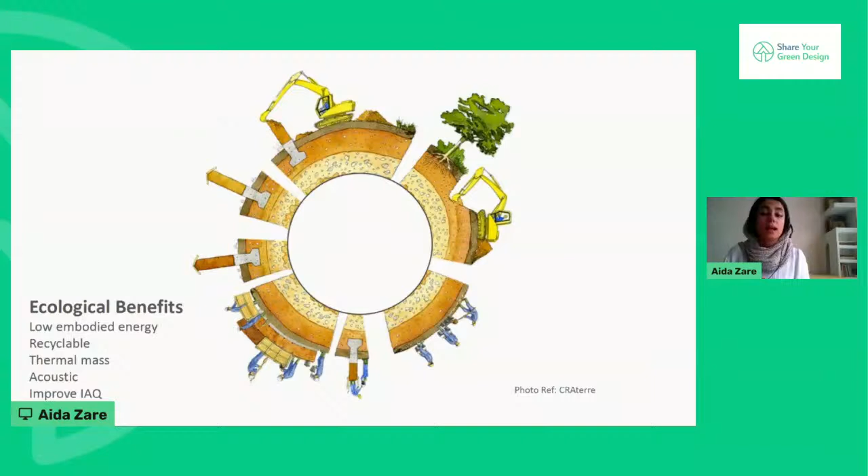But along with the environmental benefits of earth materials, one very interesting and important thing about this material is that it has a very unique originality, and the history of earth architecture is, we can say, like the history of architecture itself.

And we have lots of magnificent examples of earth architecture from different civilizations and ancient civilizations. It's very important to care about the cultural, economical, and also social aspects of this kind of material.

And there are some programs, for example the World Heritage Earthen Architecture program in UNESCO, trying to conserve this cultural heritage, I mean earth architecture, and also knowing more about it and using it more in contemporary architecture. One of the programs is the Terra Fibra Award, which is a global award in contemporary earth and fiber-based architecture, that can show that these kinds of natural materials have really something more than just ecological benefits.

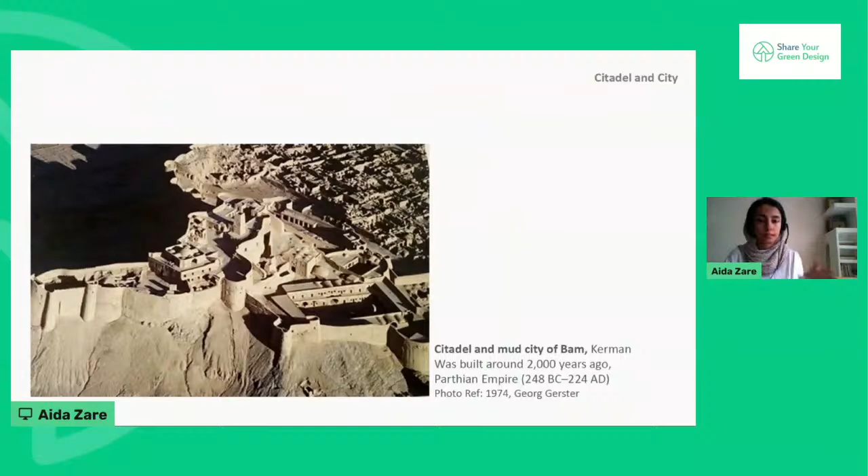The next citadel is again located near Shiraz - the Izad Khast citadel, built around 2,000 years ago. It was built with the beautiful light-colored earth of this region, which is very high quality. We can see some of the buildings in this citadel rise around 5 stories, and if you think about the time of construction, that's quite noticeable on its own.

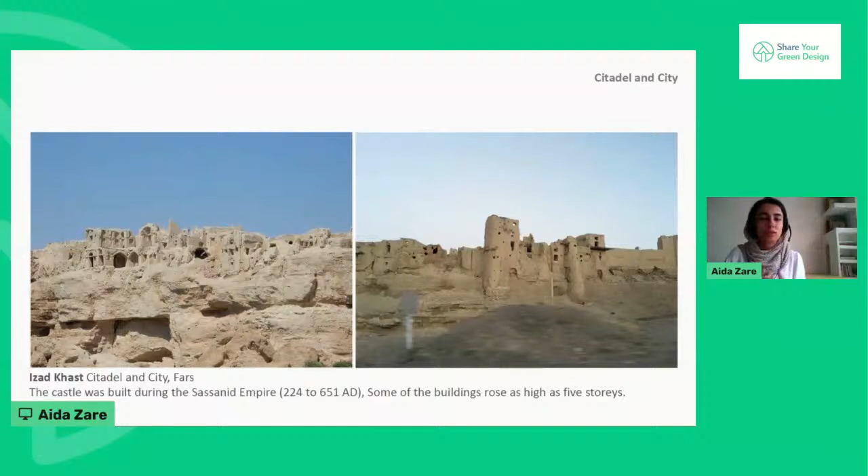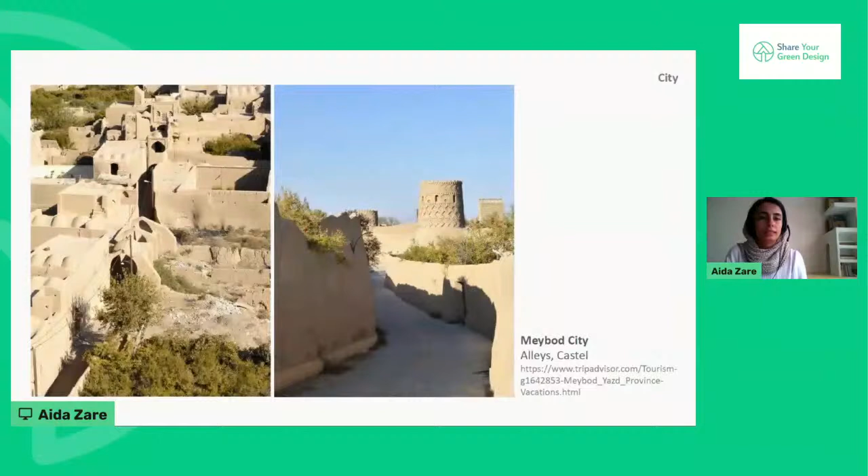The next example is Meybod city in Yazd, an ancient city that goes back around 1,500 years. It's completely made of adobe, and it's a living city to this day, working as an example of a sustainable adobe city. Here you can see the gardens, the houses of Meybod city, the alleys, and the castles.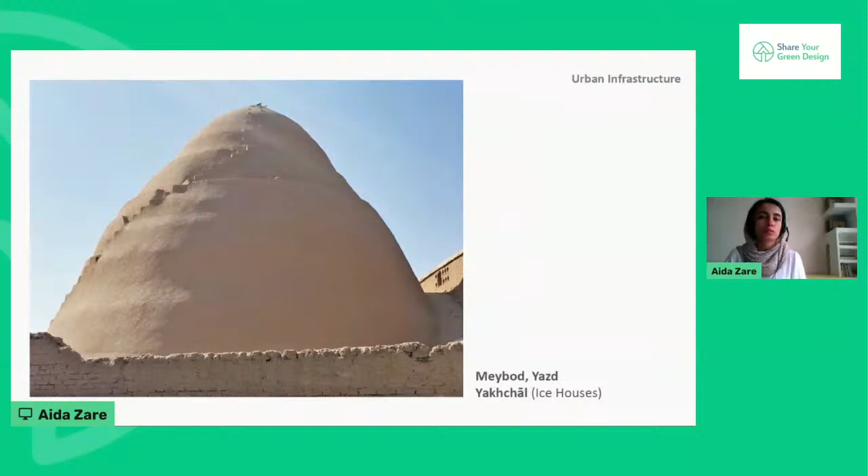This one is really a masterpiece - Meybod's ice storage, an ice house we call Yakhchal. This ice storage is a very nice example of using architecture as a tool to improve the quality of life for citizens.

You can see here a pool of very narrow depth that gave the chance to make ice in winter. Deserts have very cold winters, and they made ice in this pool, then stored it in this structure, this ice storage - and it works very well.

Just by designing passive strategies, we can see a very remarkable difference between the air temperature indoors and outdoors of this ice storage, using strategies like air sheltering, a dome-shaped ceiling, and massive adobe walls that provide these thermal conditions.

Here we can see a bowl where they stored the ice. All of this building was made of adobe, and it was plastered with a kind of lime Persian plaster called sarouj, which is water resistant. Here you can see the adobe dome of this ice storage.

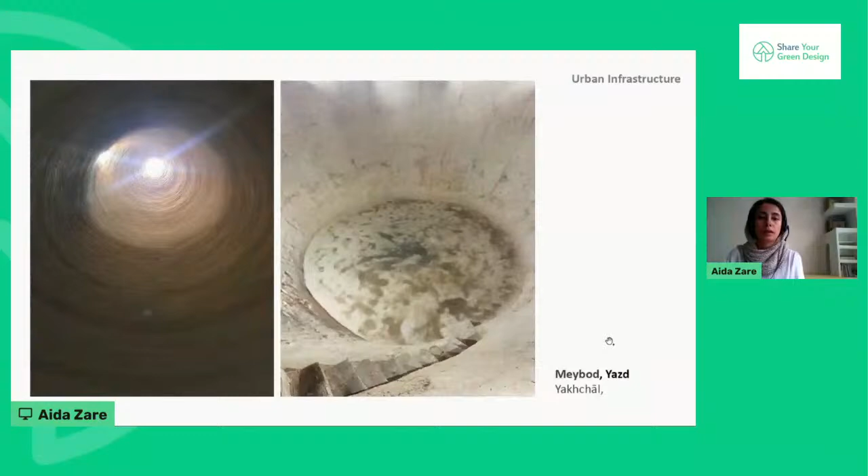These pigeon houses played a considerable role in providing pigeon waste that was used in agricultural land. Their way of making these pigeon houses, their structures, the module of the Adobe, and also caring about the condition of living for the pigeons is really notable. You can see they made a place to accommodate the pigeons, and they used the pigeon waste for agriculture. I think it's a very nice example of the power of architecture to provide a better life condition, not only for human beings, but also for other creatures.

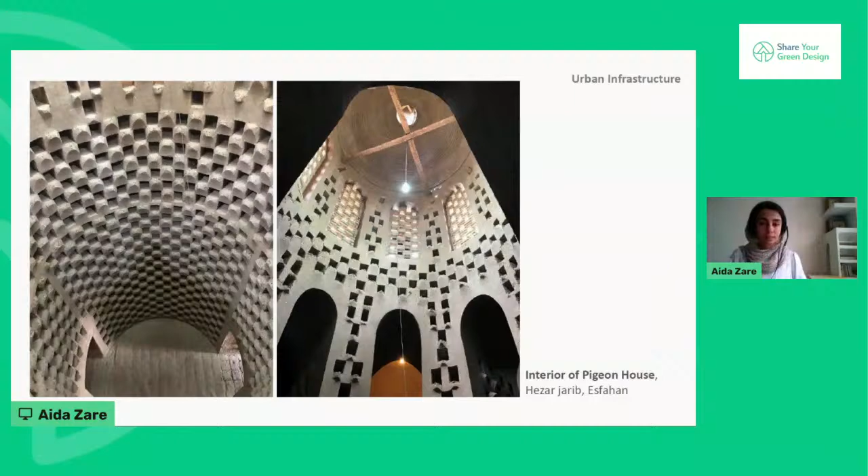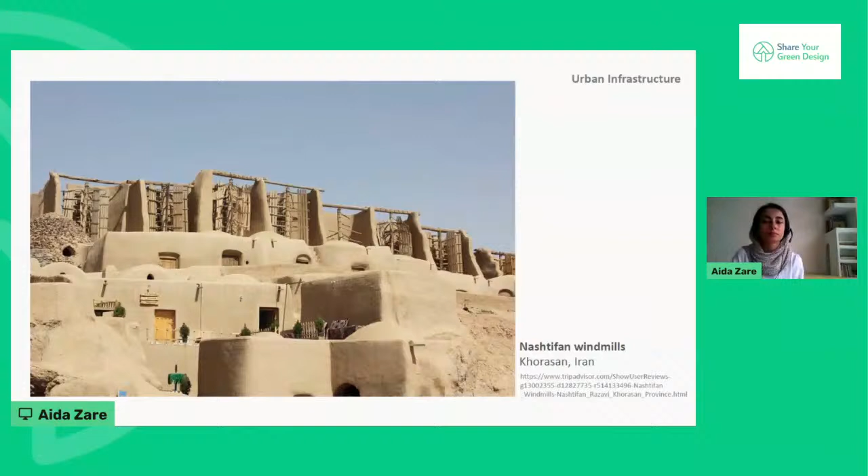Another urban infrastructure, again not in Meybod, is in Nashtifan in South Khorasan. It's the Nashtifan windmills, which were working as windmills to convert wind energy into mechanical energy. They were made by Adobe, and wood is also used in some part of the mill structure.

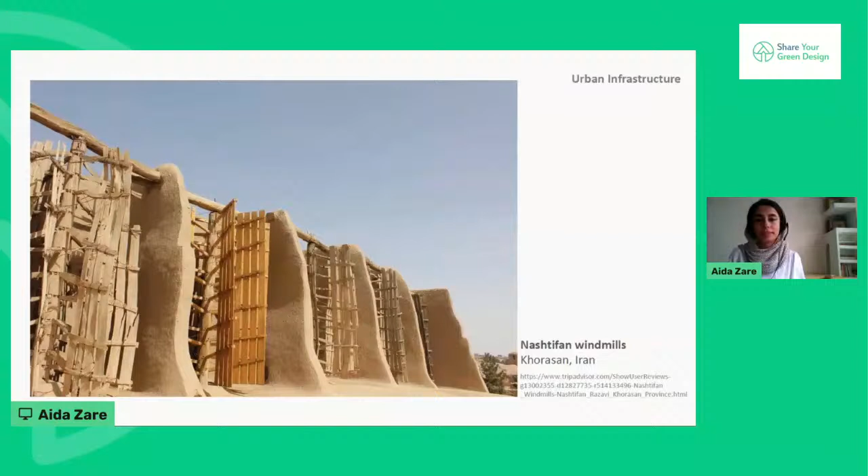On one hand it's the function of this building, and on the other hand it's the beauty and the cultural landscape that they create in these regions. It's really eye-catching, these Adobe windmills.

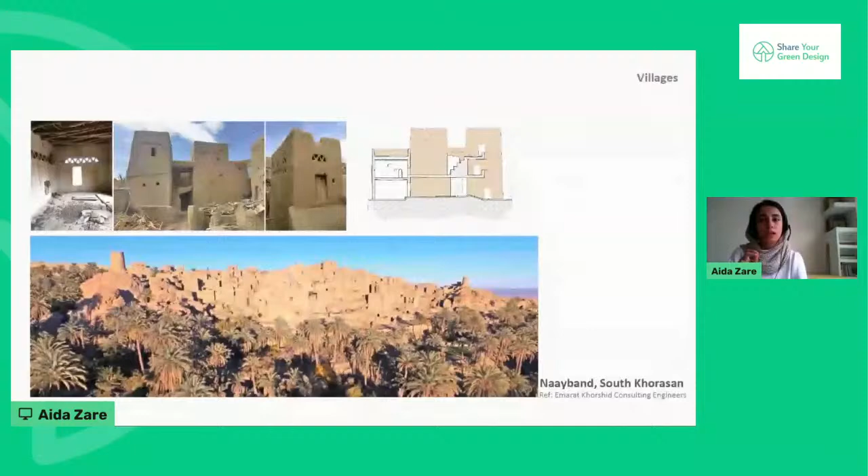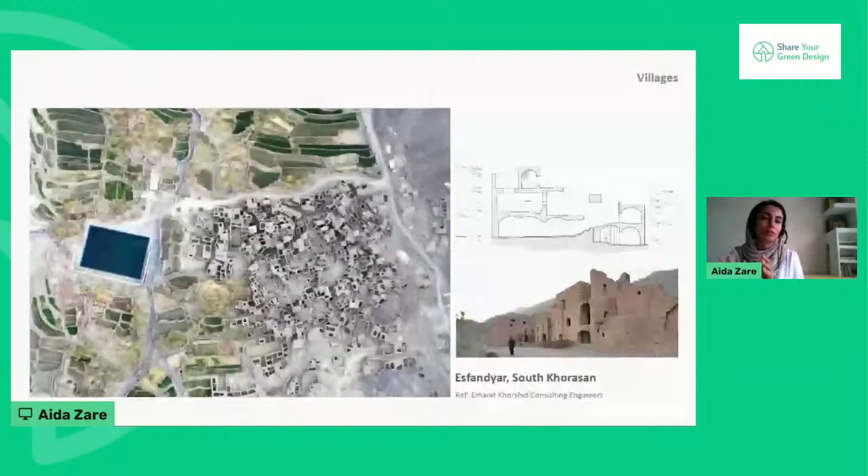The other one is Esfandyar, near to Naayband. But if you pay attention to these 2 villages, you can notice that although the climate and the kind of earth they use is similar, the architecture typology is quite different.

There are 2 main points about this kind of architecture and earth material that I'm going to speak about. The first one is diversity, especially when we look at the vernacular architecture of different regions, we can find unique and contextual kinds of architecture, which are not designed and constructed by architects, but constructed by local people.

They do not know architecture formally, but they really did it very well, especially in the villages. When we pay more attention to the different villages that are features of vernacular architecture, we find that although they all use natural materials, and sometimes even the locations are near, according to different matters that happen in their context, we see a very nice diversity in this kind of architecture. I think this is gained from living and experiencing nature by local people.

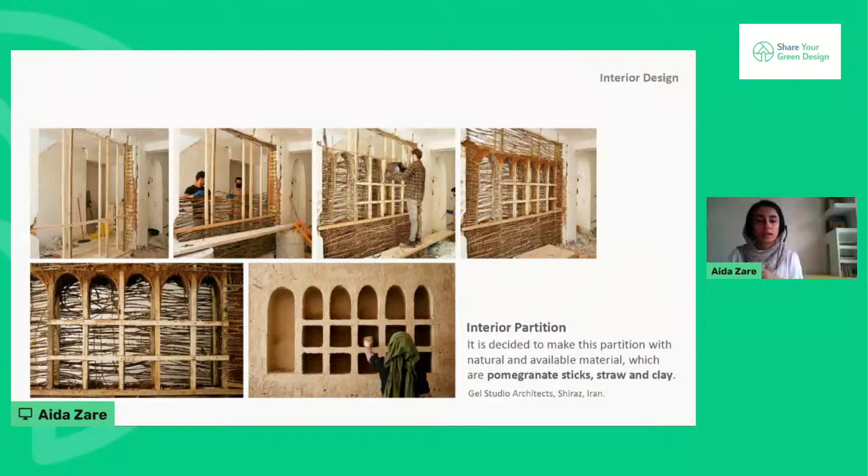The other example, again from Gel Studio, is for the interior design of a doctor's office in Shiraz. We wanted to have a greenhouse in this doctor's office because it was in the south part of the office. We had this chance to add adobe seats as a thermal mass and also glazing, making this semi-open space work as a greenhouse.

Here you can see the process of making the adobes that we designed for these adobe seats. We tried to reduce the amount of mortar and reduce the masonry operations by designing these modules for the adobe.

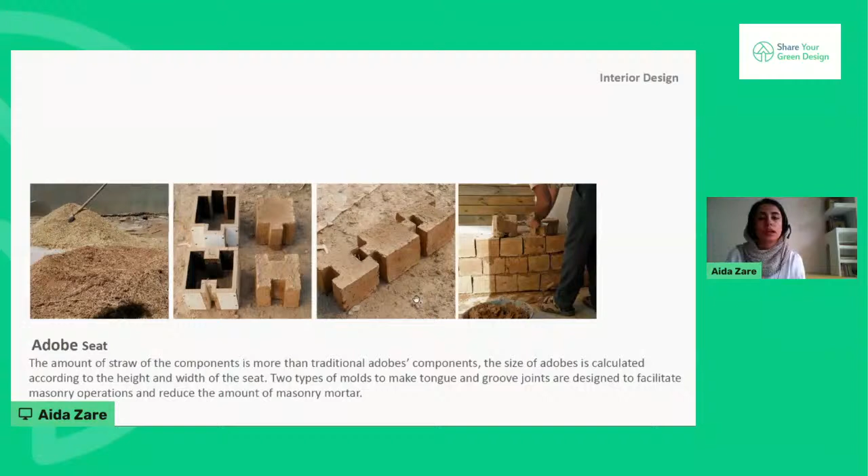Another example is making a shader, to have a curtain outside the window of the sounds room of this doctor's office. We wanted a handmade shader, and this was mostly like a research project for our studio, because we had to try different aggregates of Sarooj, this ancient mortar, to make something water resistant.

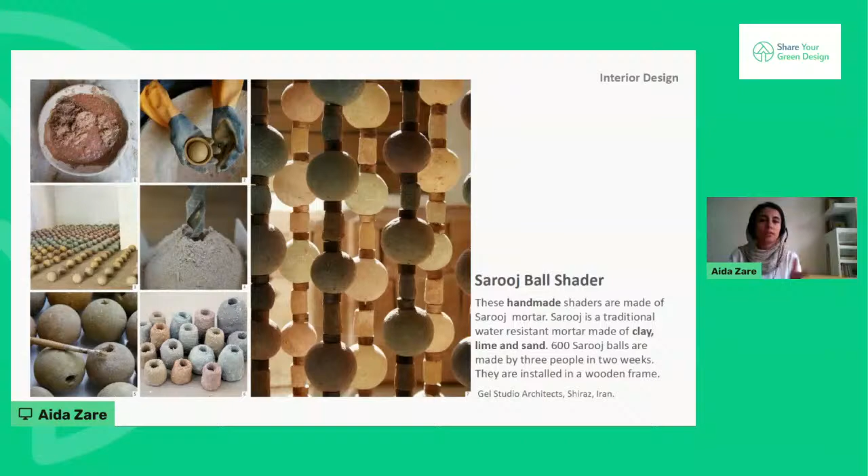We tested lots of aggregates, and made 600 Sarooj balls with 3 people in 2 weeks. Then we installed it in a wooden frame in this office.

The last and the best that we can do by earth material is renovating, retrofitting, and refurbishment of existing buildings and existing earth sites. Having a full earth city or full earth building is not that easy, but if we start renovating and retrofitting earth sites, it would be very nice and pleasant.

This project belongs to Emarat Khorshid consultants in Tehran. They have a restoration program for Esfahak village, which is located in South Khorasan. This village, after an earthquake, was abandoned, and after some years the villagers wanted to come back to this city.

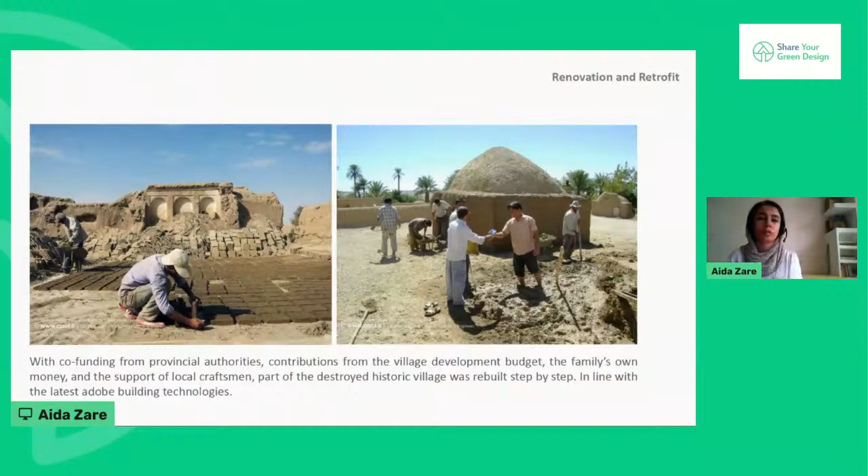Emarat Khorshid consultants have some programs cooperating with local people to renovate this village. Now around seven guest houses, the mosque, and also the Persian bathroom, the hammam, of this village are renovated.

One of the very nice kinds of retrofitting or adaptive reuse is designing the Esfahak Mud Research Center, renovating the school of this village as a mud research center.

For some years, professionals in earth architecture and also local experts have been invited to this site, and some national and international workshops happen at the site of Esfahak village, in the Esfahak Mud Research Center. It's really a very nice thing that happens in this village.

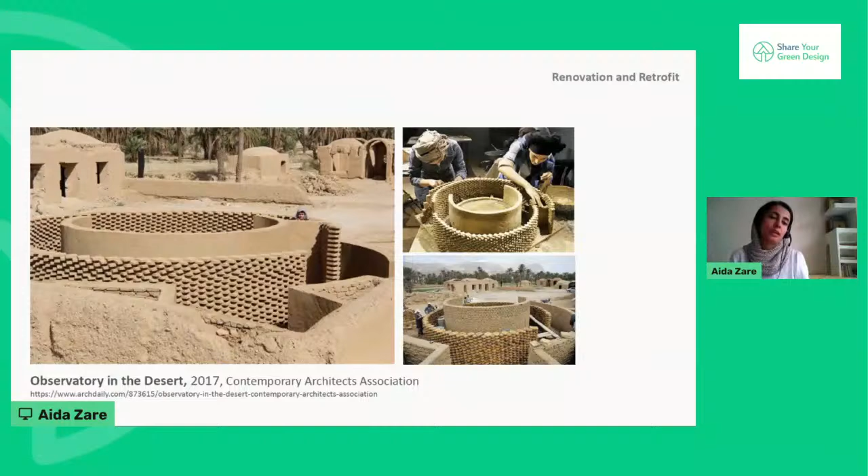Here you can see the observatory made by Esfahak students, Esfahak Earth Research Center students. They made this observatory with adobe at the site of the Esfahak Research Center.

Whenever I see this sky, I think about the fact that in our cities we are deprived of seeing this sky every night. I think if we had the chance to see it, maybe we would act better, and we could have a better feeling toward being part of this ecosystem.

I think it's very important to think about all our decisions and activities, in any field we are active in, about the other parts of this ecosystem, and to have a holistic idea toward this.

Thanks everyone for your attention. I will hear your questions.